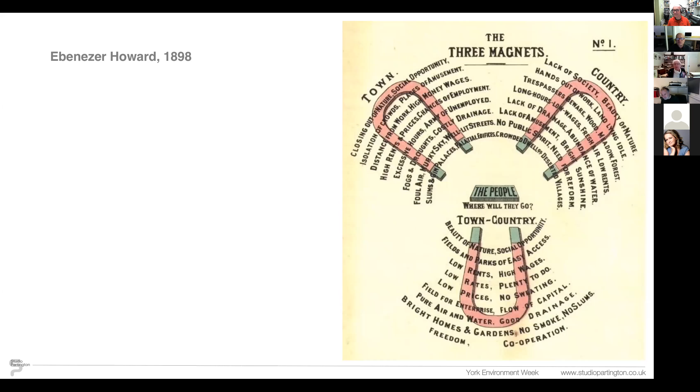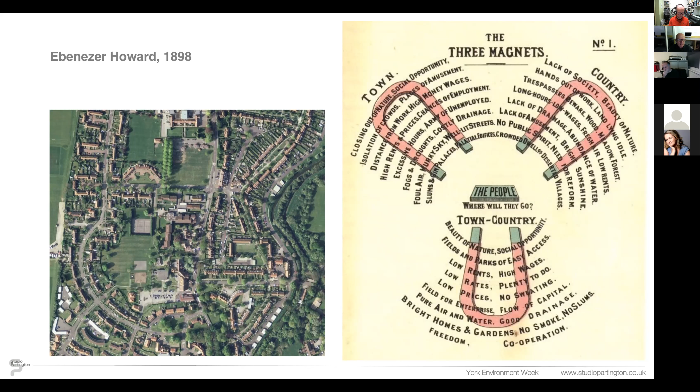And Derwenthorpe, of course, is, because of its position on the edge of the city, in some ways very kind of close to the potential for Garden City thinking. So it's on the edge of the green belt, but it's well enough connected to the city. And with the expansion of the university, it's also really well connected to workplace. So some of the kind of Howardian thinking resonates a little bit in the way that people thought about Derwenthorpe in the early stages. So that's the sort of historical context.

But the contemporary context, so thinking about how to deliver homes in sort of 2005, the beginning of the 21st century, and especially how public housing was funded, is absolutely characterized by standards and design guidance and regulations. And in fact, you couldn't build public housing without adhering to this sort of plethora of standards.

And unfortunately, it got picked up by David Cameron, and it was used by the coalition in 2009 and 2010 as a sort of rallying illustration of why modern society was bogged down with bureaucracy and all of this unnecessary procedural stuff that the Labour government had introduced. My point really, though, is that although all these things are well-meaning and we do need regulations and standards, what tends to happen is everybody designs down to them and they don't really set the context for ambition or creativity or aspiration.

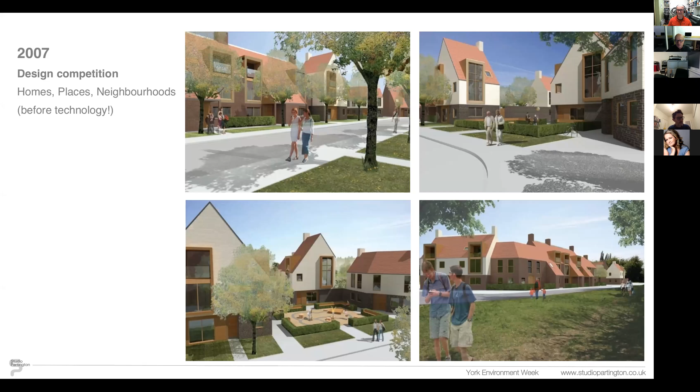And the reason that the project withstood all of that pressure is really because of the strength of personality and conviction of trustees at Joseph Rowntree, key people at York City Council who were the landowner when we first made the first planning applications, and the team that the Rowntree assembled, so people who were advisors, professionals, advocates for good design and for some ambition. And so in this talk, when I say we, I don't mean we as a practice or we as architects, I mean that collective group of people who defended the ambition of the project and saw it through all of the travails of trying to build after a really catastrophic recession.

So there's just one more thing to say really in terms of background and what we were doing, because it's another thing that's really not understood about Derwenthorpe or is slightly overlooked. And it goes back to the purpose and mission of the Rowntree Foundation really, and the Housing Trust, which at the time was encapsulated in the words search, demonstrate and influence. And lots of people felt that Rowntree was very good at doing research, policy research, social research. And they had done one or two very small demonstration projects, but the influence part of their mission, they had been very quiet on and hadn't really made an impact on mainstream thinking.

And so when it came to the time to decide how we would build this scheme, there were some really interesting conversations. And the general feeling was that it would be quite straightforward to go and find a local building contractor, a really competent builder to build these fairly unique houses, all one-off bespoke homes, and to do that well and to have a scheme that was successful in terms of construction quality, and probably environmentally as well. But actually that wasn't going to change the way that homes were built in the UK. And it wasn't going to get the major house builders engaged with things like the Code for Sustainable Homes and the Zero Carbon Homes policy.

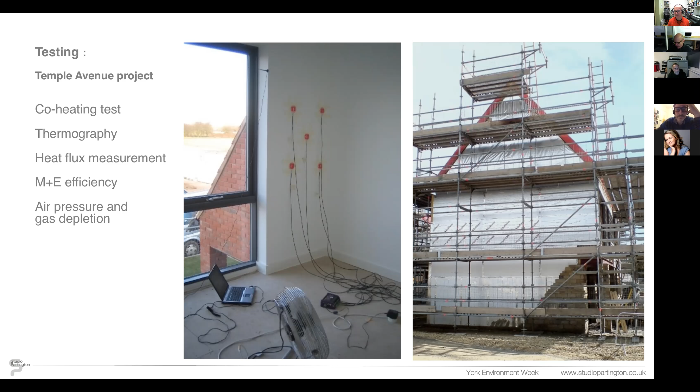And of course, Joseph Rowntree being Joseph Rowntree, they did some of the things that are normally left to the end of a project right at the beginning. So the first thing they built was a park, and they invited all of the local neighborhood to participate in the use of that and the play area. And it was connected by a public thoroughfare, which was the Sustrans route.

And there's been much discussion, if you know about the history of Derwenthorpe, about the validity of the decision to use district heating and its relevance in terms of low carbon and low energy design. But at the time, you know, there were huge incentives, for instance, the renewable heat incentive. And it's an indication really of how much energy policy has changed in such a short period of time that we're now talking about all electric housing schemes and a decarbonised grid.

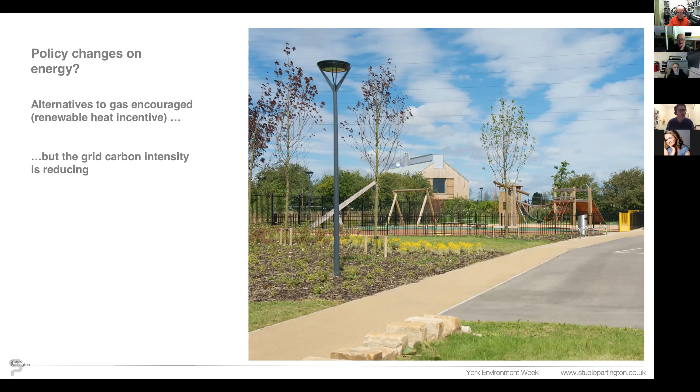Whereas when we started Derwenthorpe, you wouldn't have been able to get an electrically heated house through building regulations because of the carbon intensity in electricity. So things have moved very rapidly, and we've been very fortunate because we've been involved for this 13-year period, that we've been able to adapt the designs and adapt some of the technology as time has evolved.

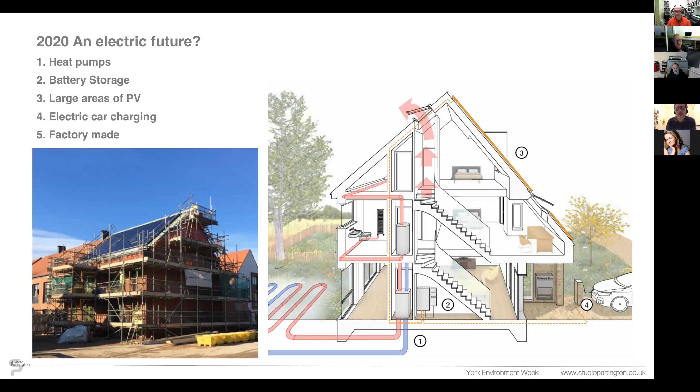And the most recent homes we've built at Derwenthorpe have actually been off the district heating system, and they have been built with a different kind of approach where the solar capacity has been maximized. They're electrically heated through heat pumps, and they're built through a set of conventions that are intended to assure the performance of the homes over the next 30 years. So there's a contract with a separate contractor who's basically underwriting the energy performance.

So I've got a few slides now just on really the things that I think worked very well. And looking at those, they're all actually things that people told us not to do. And when I say people, I kind of mean the bureaucrats and the officials and the council type people who really adhered to all that matrix of standards that I showed you at the beginning of the talk. They're the people who kind of need a design guide as a kind of nursing blanket to give them comfort in discussion with designers.

And lots of the things that we did are actually things that were going contrary to that kind of received wisdom and that practice. So the first one, and this is an initiative that's been pioneered in York actually, and the council must have credit for that, was to entirely integrate the affordable housing. And Derwenthorpe is pretty much unique, I think, in the country in a private-public partnership of having 40% of the homes as affordable homes. And the homes are scattered around the scheme in an entirely random way.

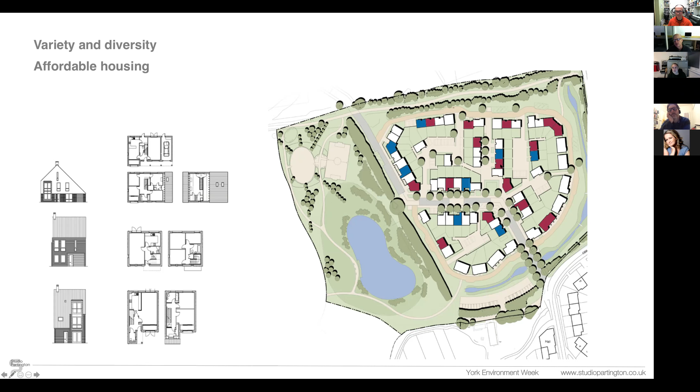It means you have no idea when you're walking around which is a rented home, which is a shared ownership home, and which is a private home. And an example, say here in this little part, white is private, blue is shared ownership, red is a socially rented home. And you see that in practice and with what's built, there's absolutely no differentiation externally.

And we did lots of work on trying to devise a range of different types of house. So starter homes, which were big enough for a family to expand into, so a home that wouldn't evict you at the beginning of life. And then homes that were incredibly flexible in terms of adaptation and changes that you could make as you got to later life or infirmity or disability. So what people now call lifetime homes, which was again pioneered by Joseph Rowntree and trialled very much at Derwenthorpe.

And we created streets that weren't dominated by cars. So this was a kind of European idea of making home zones, but specifically identifying parts of the scheme where a car would only venture into it if you needed to make a delivery or drop somebody off. And all the surfaces where vehicles would normally be driving on tarmac, with local authority curbs and yellow lining and signage, we did away with that entirely.

And we just said, look, everybody should just walk on footpaths, and footpaths should, as you get nearer the home, get progressively more refined and nicer quality. So as you get to the entrance of the door, there's something that celebrates the fact that you've arrived. On the right-hand image, you see at the end there's a little space, a little square at the end of that home zone. And here we put a little park, a little play area.

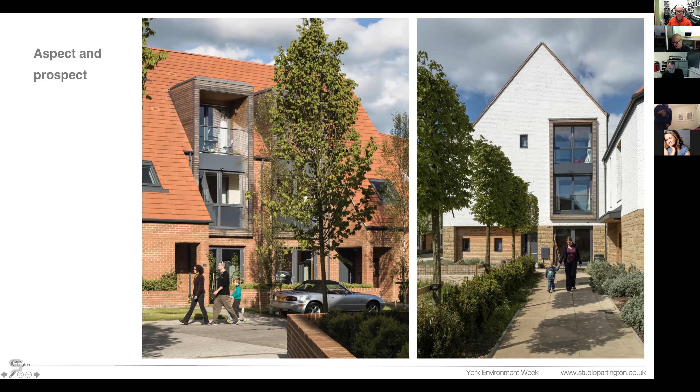And so on the townhouses and these taller houses, what we thought would be nice is we'd create a kind of haven at the top of the house where the master bedroom has a really generous ensuite, it has a dressing room, it has a study, and it has this external balcony at the top of the house. And of course, that's proven to be something of a godsend. Firstly, parents or people doing work at home can be detached from the noise of the shared living space on the ground floor. But it's also proven to be something of a refuge now that we're all living with each other, having homeschool and homework and multi-generational living forced on us by some of the circumstances this year.

So this is a great one. This is a house that I designed, and basically, I just sat down and designed a house that I'd love to have. And it became one of the house types at Derwenthorpe. And we were told by this character called the Secure by Design Officer, again, very well-meaning, wants to reduce crime by designing out the potential for antisocial behavior or threatening behavior. So you don't want to have these setbacks by the entrance. You don't want to have these columns. Somebody mischievous could hide behind them. It's a completely reductive view of the world.

I think every house needs to have a generous area where, if it's south-facing, you can sit out the front and say hello to your neighbours, where you can tend your front garden, where if you're arriving with all the shopping, you can put your bags down on a chair and you can find your keys without getting soaking wet. So, some of the things that we know instinctively characterize a really great home are beginning to be filtered out by some of this well-meaning design by code and design by standard.

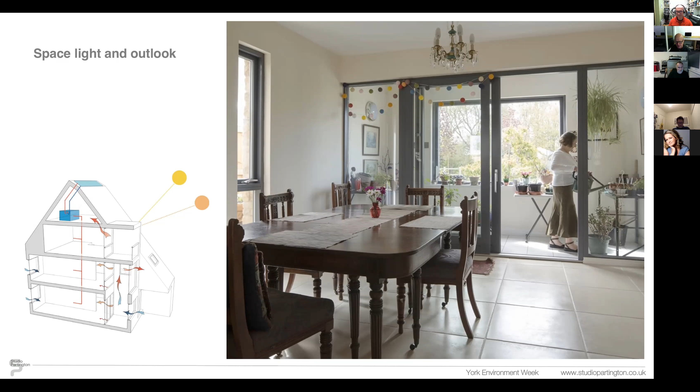And of course, I was laughed out of York when, 5 years ago, I was talking about homes overheating. What I should have done, I guess, is just say, actually, these homes have no purpose whatsoever, but people are going to love them. And that's the best reason for keeping them. So they were a bit of a casualty of value engineering.

The things that were retained all the way through the scheme were the quality of the landscape and the external environment. And we just took the view that the landscape was a gift. Why wouldn't you do your level best to make best use of it and design around it? So instead of seeing trees as awkward things that get in the way of your road layout or reduce the density, you make the tree the focus wherever you can of one of these meeting and resting places.

And we also inherited, as part of the original outline plan, some protected landscapes. So what you see here is actually the remnants of a ridge and furrow field. And so that's been incorporated with the Sustrans route, within one of the landscape spaces that the houses overlook.

And it's been really extraordinary, right from the beginning of lockdown, the number of people who've emailed me or contacted me to say, we feel so lucky, we're so fortunate that we have a home that we really enjoy, but it's also a home that's in this extraordinary landscape, this kind of relief from the pressure of lockdown and being inside.

One of the things that's not been so successful, and I think this is an issue in the whole of York really, and David McHale is going to really come up against it in his projects around Bishopsthorpe, is that York still doesn't have the quality of public transport that means that most journeys are automatically more convenient by cycle or by walking or by taking the bus.

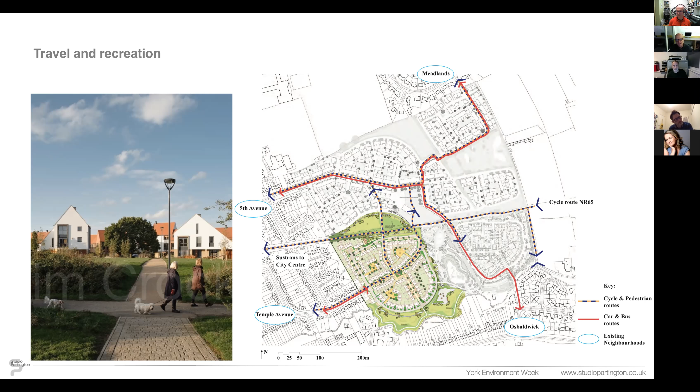And we use the car club car for going to the dump, great idea, picking up the bricks from the builder's merchant, hauling the charcoal for the barbecue and things. So beginning to be, I think, a change a little bit in people's expectation that they'd have space for 2 or 3 cars with their home.

But other things to do with public realm and parking went incredibly well. And one of the things that we really benefited from was a really progressive attitude from the highways department in York. And people in design and built environment are always kind of frustrated by highways rules and highways regulations, turning circles for bin lorries and set off distances and verges for services and things.

And York, to their credit, and if you've ever worked outside the city, you'll know how difficult it is, York were absolutely pioneering in buying into this idea that the streets could be shared spaces where basically you walk down the middle of the street, you don't need a designated footpath. And motorists get used to the idea that you're driving through a pedestrian domain.

So you drive as if you're driving on a campsite, you know, just expecting kids to be on their bikes, a ball to kind of appear out of nowhere, somebody to be, you know, not expecting a car. So the cars drive very slowly. And one of the reasons why the highways people said, well, we can really understand what you have in mind.

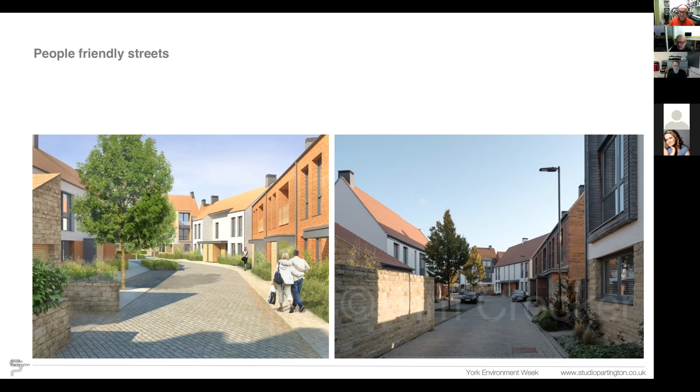And you can see there's a really strong correspondence between what we imagined and what we tried to describe to other people and what was actually built. And again, that's down to this kind of perseverance really of trustees and the people who were the guardians of the project. A fantastically supportive environment for us to work in.

So Richard, are you kind of close to the end of yours?

Very, very close, yeah. So you can imagine the conversations we had about guardrails and water and the health and safety obsessives saying, oh, you know, you can't put a lake in the middle of the scheme. It's sort of a dangerous thing to do and all that kind of stuff. But of course, the lake didn't start life as a lake.

It was a SUDS scheme, you know, to balance the surface water runoff and not discharge too much water into Osbaldwick Beck. And it was kind of one of our main contributions, that is us as Studio Partington, to say, well, no, this needs to be a central feature of the scheme. It needs to be kind of the defining external landscape feature.

And so we made it much shallower and we made the edges very, very gentle. So you can walk quite a long way into it before you're out of your depth. So it's relatively safe for kids. And it became the focus and the kind of center point of both the ecology and all the landscape and public places.

So just a few slides to finish off really, to go back to this question of whether we actually influence mainstream practice. And there was a kind of purple period while we were coming to the end on Derwenthorpe, where we were also asked to work for Barratt on several schemes. And this one at Terry's Chocolate Works got built.

And it was while there were still some very pioneering and ambitious people in the Barratt organization, all of whom have now moved on. And it was also before the government gave up on any kind of standards for housing and any kind of emphasis on design quality. So by the time the Tories had got re-elected and abandoned their coalition partners, they had really been mugged by the house building industry, who said, we just can't deliver the number of homes we need if we're bogged down with all these environmental standards.

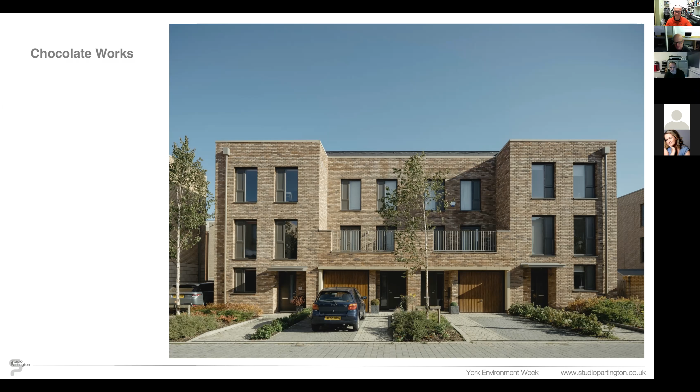And we introduced this first floor balcony, and we insisted on doing, actually, and York backed us up on this, all the working drawings for the scheme and supervising all of the construction all the way through. And Barratt probably built every house twice to get it right. So it was a painful process for them and painful for us. But this kind of architecture really relies on the quality of the detailing, and the quality of the execution is actually of a very high standard.

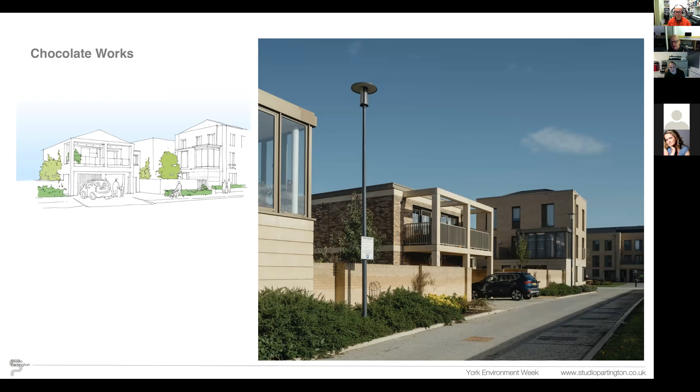We persuaded them to do all kinds of interesting things. So like this conservatory at the first floor is an extension of a first floor living room. And this house on a corner has one of the larger gardens, but its garage at the end of the garden then has an apartment above it. So we were trying to make a streetscape with pavilions and coach houses rather than just large houses with garages at the end of them on a side street. And you can see the little thumbnail sketch on the left is our conceptual drawing, drawn 4 or 5 years before this was actually executed and delivered on site.

Getting them to engage with building in stone, building this fantastic south-facing colonnade was very difficult. And we had to use all our guile and persuasive ability really to suggest things like, well, on this building, don't build one of your expensive marketing suites. Don't throw all that money at a new building that's only temporary. Why don't we do a building that's a mixed-use building? Put the marketing suite in it on the ground floor, and then in 5 years' time when the scheme's built, that will just change use to become the supermarket or the convenience store. So they went along with all of these suggestions, which for them were right outside their comfort zone.

So to come back to things that I value, and these are the kind of things I do when I'm bored in site meetings. I go around and I take photographs of people's front doors. And I think these are the strongest indicators of whether we are creating a neighborhood, whether people feel comfortable and feel that their home is something of a haven and a refuge, but also something that's liberating and empowering. The fact that people leave Wellington boots out and benches, they leave their pots outside the front doors. They've customized all of their door numbers.

This little lad at the bottom, I met him down at the Osbaldwick village end of the scheme with my camera taking photographs. He goes, "Oh, mister, can I be in your photographs?" I said, "Well, I'm not sure about that. That's not really what I should be doing, photographing you, but let's go and talk to your mum. And if she says it's okay to be in a photograph, then that's fine." And this guy raced off on his bike and I followed him on my bike. And it took me about 15 minutes to catch up with him and get to his house. So his family were obviously really confident that he was playing on his bike, such a long way away from his house, perfectly safely. And of course, very pleased to then be in the photograph on our website.

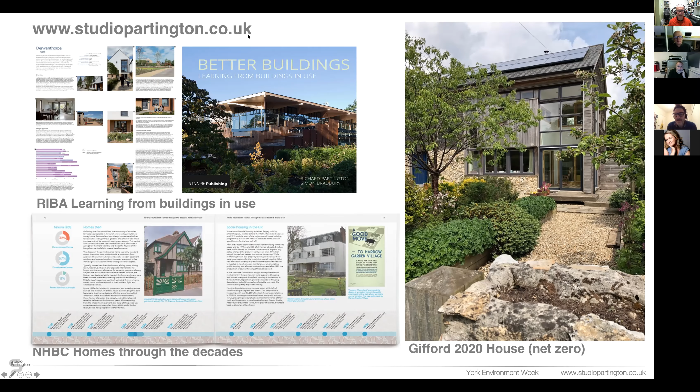He's now turned his camera off. And I need to work out how to stop screen sharing, Phil. Yes, that's it. Hi, everyone. Hi, Phil. Hi, David. Thanks for inviting me tonight. I'm sorry to give you a heart attack earlier.

Excellent. Right, you should be able to screen share now and put your presentation on. And do feel free, please, just to give a brief introduction of yourself, because I've left it to the two of you to say who you are and to tell people what you want them to know. Yeah. Share a screen. Let's have a look. Desktop. Share desktop. Brilliant. Can you see that? If I go full screen. There we are. So Phil, yeah, thanks.

I'm David Mikhail, founding director of Mikhail Riches. We're architects with a focus on housing, both local authority and private. I'm just conscious of time. I've been told I've got 20 minutes. I've got 60 slides, so I better rattle on.

I just wanted to pay homage, first of all, to Phil, and I know that he introduced us to York via the Housing Design Awards and with a focus on our scheme for Church Walk. So I'm going to talk about that before moving on to Goldsmith Street, some of the learning that went into Goldsmith Street from previous projects, and then finally a lens on the work we're doing with York City Council, if that sounds okay.

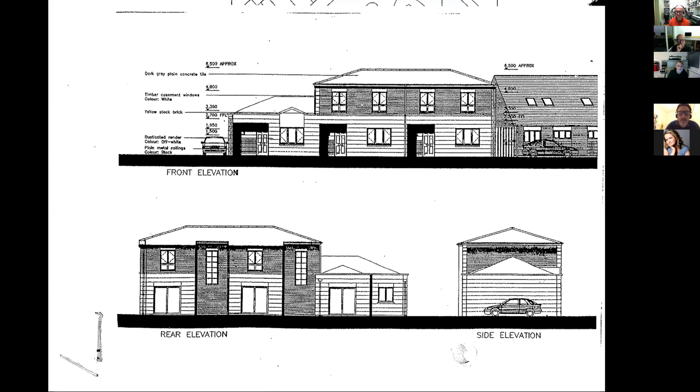Right, so back in 2004, I think, I got an email saying there was this site down the road and it was up for auction, and good news, because I've been looking for a site for a long time, and the bad news was I had 3 days to go before the auction. It came with a planning permission for 2 houses and a bungalow. It was also massively overlooked from a building at the back. As you can see, living rooms looking over the site.

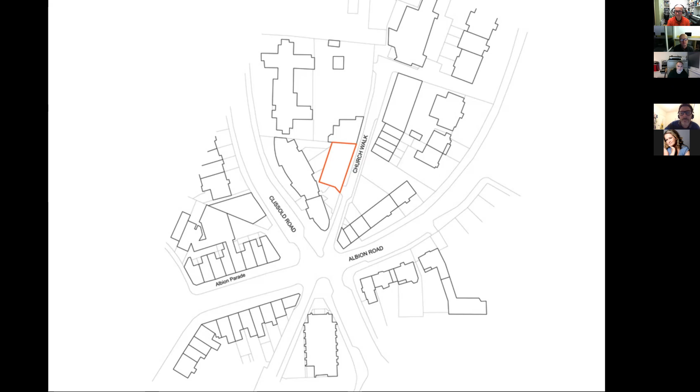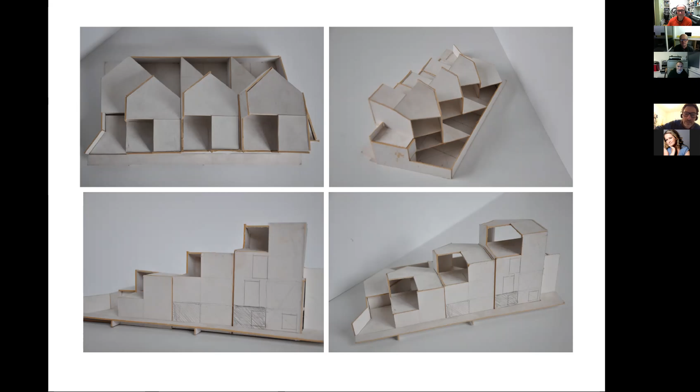And the scheme we did for it on our kitchen table, Annalie and I, and made of cardboard, was all about trying to optimize a very tight 22 meter by 11 meter site in such a way that we avoided those windows overlooking at the rear. And the strategy for that in plan was this. So the street is to the bottom of the page, and to the top is our neighbor, which was at a kind of 45-degree angle to what is predominantly a rectangular site.

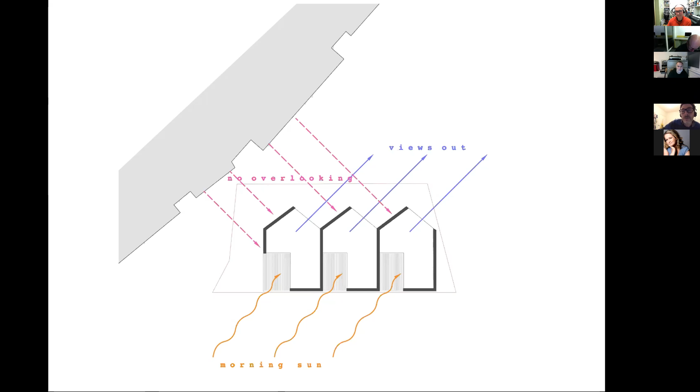And so we evolved this kind of geometric technique for a tessellated plan with solid walls presented to the neighbors, allowing perpendicular windows which avoided overlooking and being overlooked, and also enjoyed long views out. And as built, that's pretty much what we've done. And that tessellation appears in the building in various ways, with little triangular roof lights on the ground floor at the back.

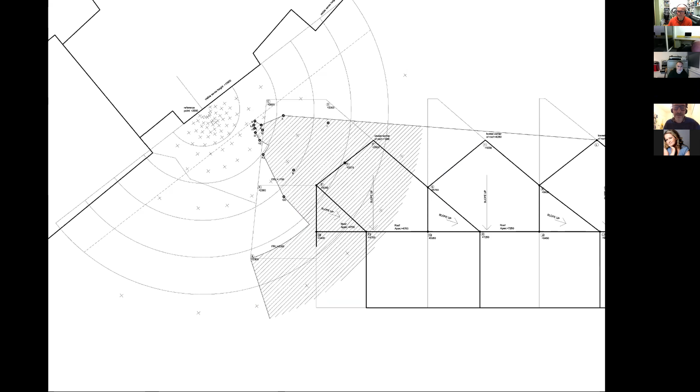Everything was very, very heavily scrutinized by the planners because there was a lot of objections from neighbors. This was our pre-computer decade rights of light and BRE daylighting guide, which was all done with a bit of cellophane and some pens. And what it really told us was that there were a number of vertices in space that we had to stay within to avoid injuring our neighbor and his or her light level. So actually a very strong response to neighborliness is, I think, what characterizes this building.

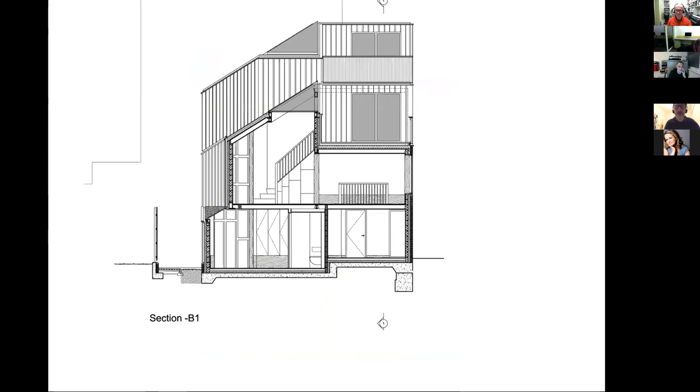So optimizing a difficult site. The building goes all the way down to 2 meters above ground floor level in that very difficult corner, all the way up to 4 stories at the other corner. And internally, I don't have time to dwell on the plans and the sections, but all the living spaces and dining areas have double height spaces with triangular roof lights. Bedrooms tend to be on the ground floor, so they're upside down houses and flats.

And that last one, which you see Annalie pushing Ridley into, is a kind of 4-story flat with its own front door. But what this project had was a series of front doors onto the street and some very difficult relationships which we wouldn't usually dream of, but which the site itself kind of enforced on us, such as bedrooms on the ground floor, onto the street. And so

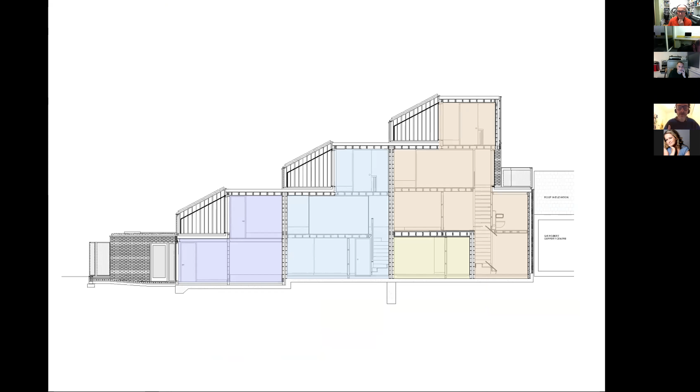how we dealt with that was some very unusual sliding security screens which allow light and views in and out, but in a very controlled way. So there's a sliding security gate which gives you a view right through to the back garden, and from the inside this 3mm aluminium mesh allows views out and light in such a way that you can manage privacy because of the strand orientation of it.

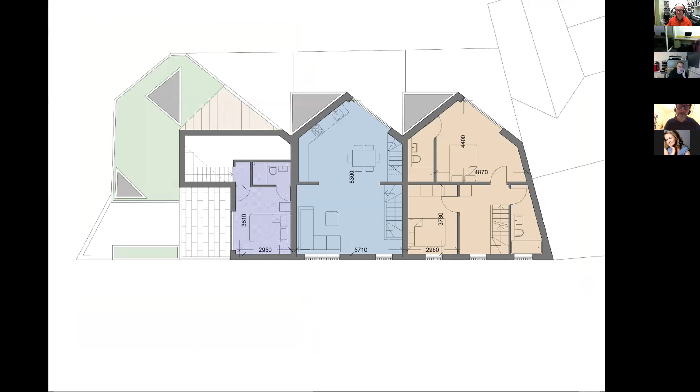So I'd say this project was incredibly bespoke, and we were thrilled that it picked up the Housing Design Award, the Mayor's Award, in fact, for that year. And I think Philip would have drawn your attention to it when you talked about the Housing Design Awards that year. And I think it's part of the work that the practice has done, which has been about domestic space, one-off houses, extensions to people's houses, thinking about what makes a great home.

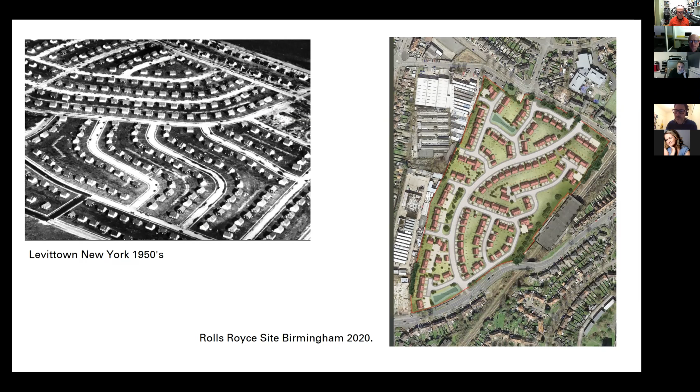And this is the enemy as far as we're concerned. This is the edges of most towns and cities in the country at the moment. There's a whole analysis that goes with the slide. I don't have time to show you, but essentially there is no communal green space. There are probably 1 or 2 trees. Everything is dominated by tarmac and parking courts. So with that in mind, I want to talk a bit about Goldsmith Street and how we got there.

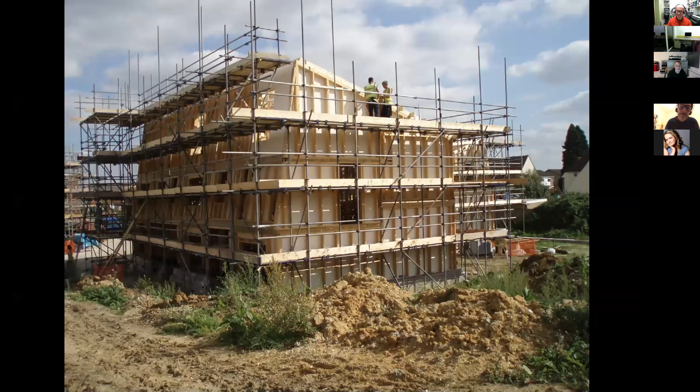In 2005, again, we were very thrilled to win our competition for housing in a village called Elmswell in Suffolk. This is it, 28 homes for a local housing association. Very deep green in its construction, so very low embodied carbon, using sprayed hempcrete into a prefabricated timber frame. There they are, gunning it in. There were some teething problems on site, as with all innovations. We had to swallow our pride and get the specialist over from France to help us, but it all came good in the end.

Some of the things we embedded in the scheme worked well, and some things didn't work so well. The district heating system, which was biomass, as Richard has said, enjoyed quite a lot of encouragement at the time, for lots of good reasons. Very low carbon, local fuel. Thetford Forest was supplying it. Didn't work very well. But what was really great was Buro Happold, who were the sustainability engineers for this project, employed one of their team at PhD level to do a 2-year post-occupancy analysis. And it's a fascinating read.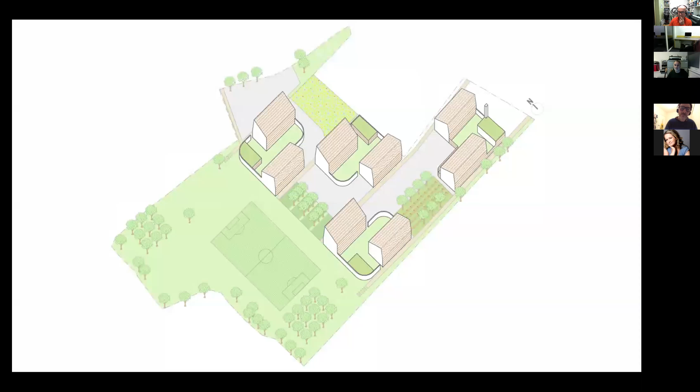I can't really talk about that tonight, but one thing we came away thinking was that if there's one thing we can do which really does bring benefits to residents, it's to face as many of the properties south as we possibly can and to harness the winter sun. Because whilst a lot of the sustainability benefits, when measured, were quite questionable, the one thing that did work really well with this scheme was the fact that we'd orientated every house to face south, and the section through the properties was all about managing that low winter sun so it penetrated into south-facing rooms.

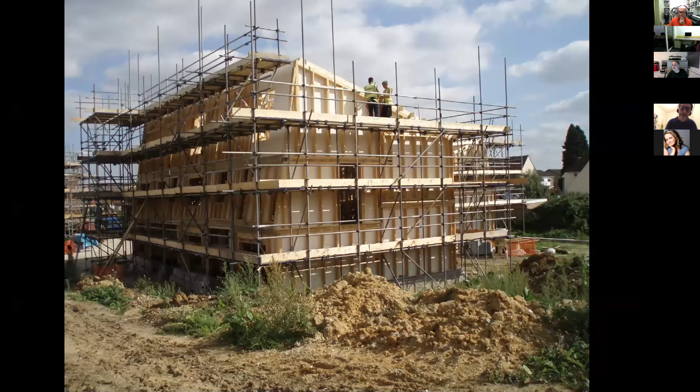And it was an aspirational brief by Norwich City Council for a very important site as far as they were concerned. It had history. They really wanted to make this an exemplar project. And the brief was inspiring enough, but actually one of the challenges of the brief was a density of about 100 homes per hectare. That was, we believe, sustainable because it's a 10-minute walk away from the centre.

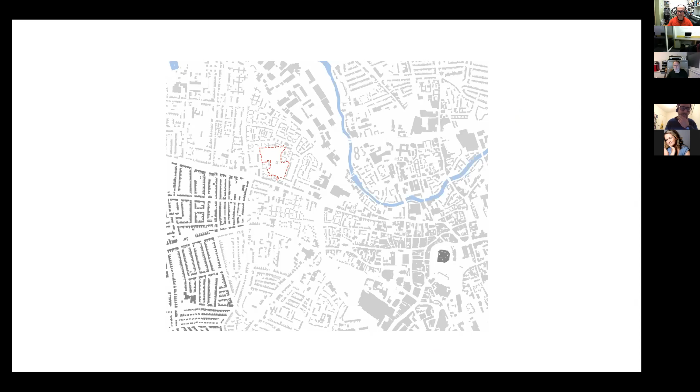However, when we looked at trying to marry both providing that level of density with family homes and houses, we couldn't really see a way to do it initially. And a lot of tracing paper was used up. In fact, I can remember we had 2 or 3 schemes and a couple of crits with friends of ours, and we had to bin a number of schemes before we alighted on the understanding really that perhaps the best model was local, that about 5 minutes walk away from the site is an area known locally and very affectionately as the Golden and Silver Triangles.

And these are the kind of houses that we find there. It's terraced housing. You find it up and down the country, really. It's not particularly remarkable or particular to Norwich, but it's Victorian, Edwardian terraced housing, front gardens, back gardens, on-street parking. And when we looked a bit more closely, we discovered that both the backs and the fronts were separated by 14 meters, which of course, as I'm sure most of you know, flies in the face of most planning guidance, which generally talks about the magical 21-meter overlooking distance. So this is Portland Street and Dover Street in Norwich.

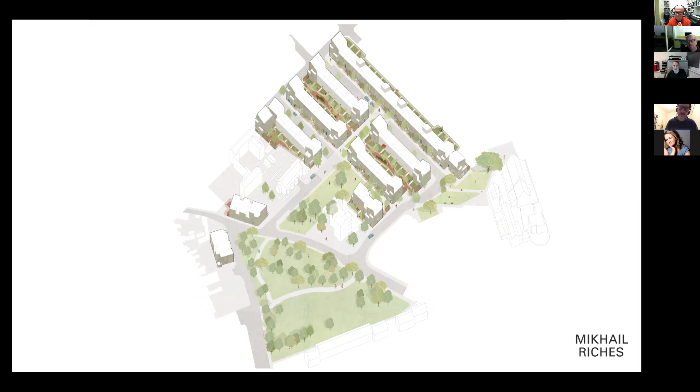So we applied 2 things to the site at Goldsmith Street. We applied the learning from Clayfield, which was to try as hard as possible to deliver a solar scheme facing south, harnessing low winter sun, but also to look at 14-meter wide separations between properties. And this is an axonometric which shows the kind of layout of the master plan, which respects a series of terraces which face south, streets separated by a 14-meter separation, and back elevations as well.

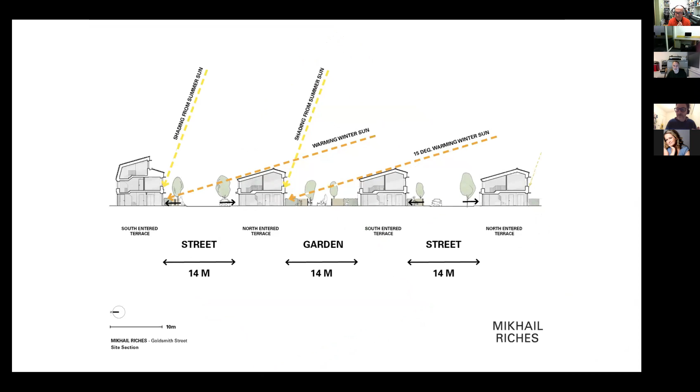In section, you can see there very clearly that the separation between terraces is 14 meters, garden and street. The roofs, like Clayfield, a different typology, but the roofs here again are modeled very carefully with very low eaves levels on the north side to ensure that the low winter sun is harnessed. When it comes to the site arrangement, the terraces have been arranged in such a way as to make sure that back gardens face existing back gardens, that wherever possible, streets and front doors are onto and connected to existing streets. So to achieve this site layout, we had to drill right down and invent new housing types, which would lend themselves to exactly this 14-meter separation.

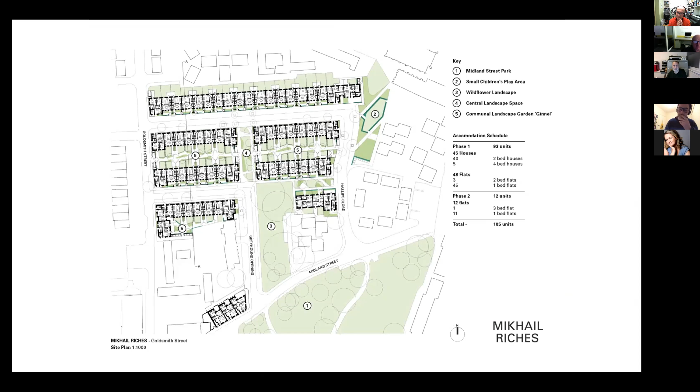A bit more detail here, you see a number of external spaces which are very important to the success of the scheme as well. So I'd like to stress that I think the success of Goldsmith Street is partially about its environmental response, its low carbon agenda through Passive House, and to an extent through low carbon materials. But I think for us as a practice, one of the most important aspects of it is the social ideas behind public space.

I don't know if you can see my cursor, Phil.

Yeah. To the right is a small children's play area, which connects to an existing church and a footpath through to the wider area. This here is a pair of existing and lovely catalpa trees, which forms the kind of focus of the whole scheme. The streets themselves are seen very much as public space with on-street car parking, street trees, etc. There's also a series of connecting alleys or ginnels between back gardens, which allow for access for bin stores and bike stores. So your bins are held at the end communally here.

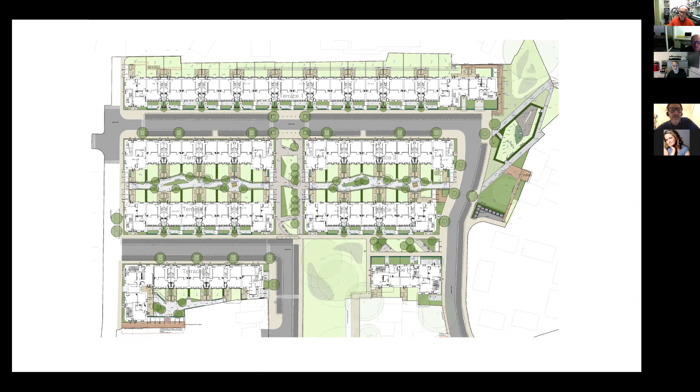And what we've done is we've slightly exaggerated the alleyway or the ginnel to make it more of a place. So it's meant to be, and I think it is, a place for children to play, but also for adults to meet.

That's a typical street, and in it you're looking at, on the left, the south-entered, south-facing front gardens and front doors of one of the terraces. To the right-hand side, you're looking at the north-entered houses. And so to the left, the houses have front gardens. To the right, on the north side, they have that situation you find in many streets up and down the UK with living room windows directly onto the street. In this case, separated by a 300mm planting zone.

That's more of the south-facing gardens, bin stores, and meter cupboards very carefully designed out so you don't really see them. And that's a view right down the center of the scheme with your back to the south. So you're looking north. And what you're seeing on the right-hand side is the catalpa that I mentioned earlier. And the bigger 3-story buildings which face onto this kind of square are the flatted end blocks. And there they are again at the other end of the terraces, this time looking down Goldsmith Street itself.

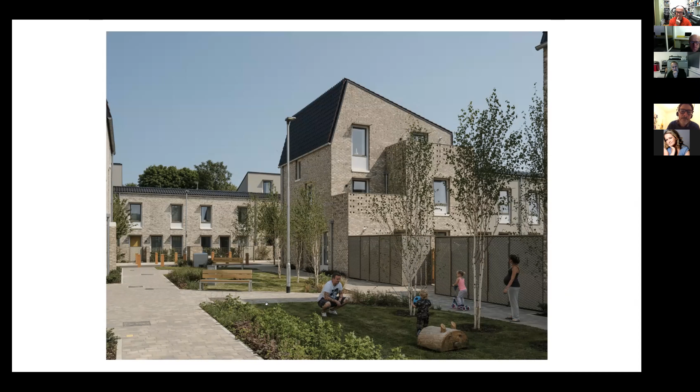And this is that central shared space, where the expanded aluminium doors of bin stores and meter cupboards kind of hide the back gardens, and you can just glimpse through here the secure gate to the ginnels. And children tend to just kind of roam through these ginnel spaces out into the public space on their scooters. That's one of the ginnels. So, it's not enormous, but it has a huge impact, I think, on the lives of residents.

One of the residents who's not got children did call it Kidmageddon, which I quite liked. She had a wry smile on her face when she said it.

And the facades of the street, the front doors, each front door is a different color. Boring, isn't it? You know, it's rectangular windows and a roof and a brick wall and front gardens. Really simple stuff in a way. There's no architectural gymnastics, but what there is is a very careful, and I'm sure any of you that have dealt with passive house principles know, a very careful iterative process of testing and retesting the exact size of the windows, the exact amount of cold bridging allowed, therefore the number of doors allowed in the scheme. So even so, we spent a lot of time trying to make sure that the architecture was as much in the process as the passive house principles, which we were signed up to achieve. So I should say everything is 100% certified passive house here.

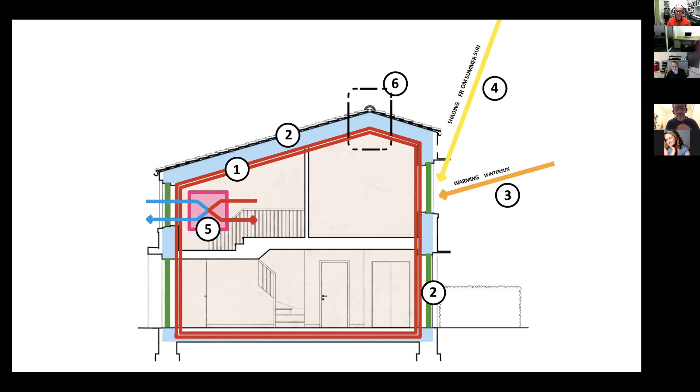We were absolutely desperate to make these houses work for people inside as well as out. So the quality of the kit in here is first rate. And we got advice from the Green Building Store, who had a lot of experience putting right whole house ventilation systems around the country that had gone wrong. So we benefited from their learning, both in terms of spec and installation. What does passive house mean for the fabric? Well, the air tightness has to be very carefully controlled.

But architecturally, you're dealing with very thick walls, as we were, because we wanted, and the client wanted, a very low carbon, non-petroleum based insulation. We used recycled newspaper blown into a timber frame with a brick cladding, which was all about the robustness at street level. We ended up with 600 mil, 2 foot thick walls.

So what you're looking at on the right is the windows, and the kind of coffered, profiled modeling of the windows is partially about making the windows look larger from the outside than they really are, because passive house wouldn't let us have them any larger. Too much heat gain in the summer and too much heat loss in the winter. So it's a kind of trick, if you like, to make the facades look a bit more generous. So the eyes on the face are larger.

But that coffering is also inside out, not making the windows look too much like a kind of castle wall and too depressing, if you like, from the inside.

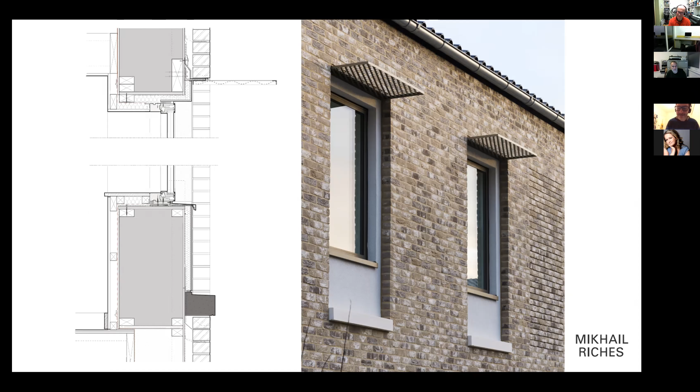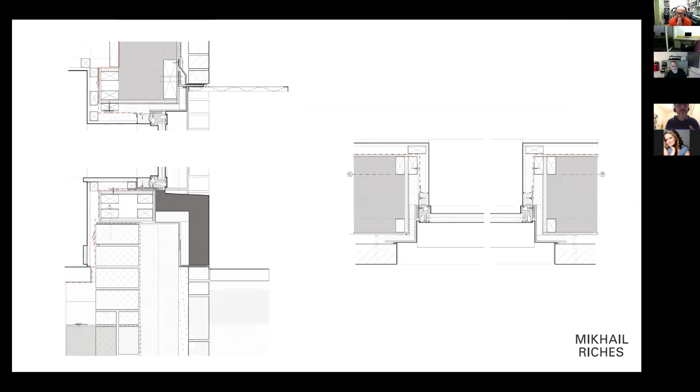My project architect, James, wasn't thrilled. He'd done all the details in zinc, but that's another story.

These are houses where you walk directly into the kitchen dining room off the street, off your front garden, or in this case, this is a south-entered house. Again, a typology we've known and loved and lived in ourselves up and down the country. You know, it took some courage from our client, but they went for it. And I think the benefit is a super wide house, 6 meters, not very deep, I think 8 meters depth. So 6 meters by 8 makes for a very light, bright home. And it had to be that dimension to get the 14-meter distance overlooking streets, etc.

So the house type is a function of the master plan rather than the kind of house builder model where you've got your house types and you just chuck them like plastic Monopoly houses on the site. This is a very different approach.

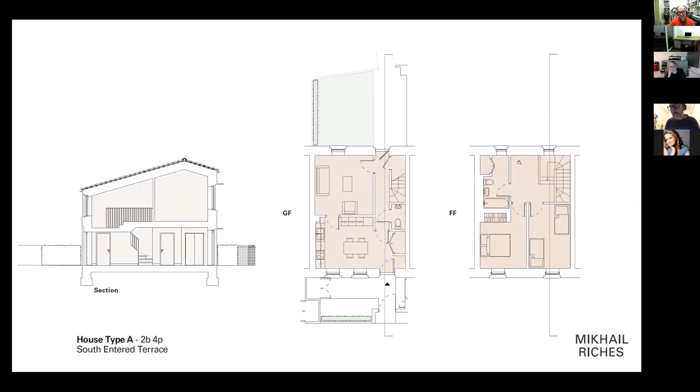2 bedrooms on the top floor, again looking south, and you can see for the eagle-eyed amongst you that the very low eaves on the north side mean a very low ceiling height over that bathroom at the back. And also it's actually 1.7, so you can still stand up. Most people can stand up here for a home working space at the back of that landing, which is very much used, I should say.

The north-entered houses, slightly different. You walk straight off the street into a hallway. But then your kitchen dining room is again facing south over your private garden. These are the north-entered houses. And you know, that slightly uncomfortable situation of a living room or a kitchen window at street level with no defensible space other than a 300 planting strip felt like a bit of a risk.

But actually, in reality, with some plantation shutters as part of the architectural spec on the inside and a bit of planting, actually, it feels great. It feels like a Victorian street does.

The flats I'm really proud of. They're the conundrum of how do you make a flat feel like a house? And I'd had experience in living in a flat where I'd walk straight up to a first floor from the front door. And we wanted to bring that to both the first floor and the second floor flats. And I think it was Annalie that came up with this idea of the scissor stair.

So the flats each enjoy their own front door on the pavement. So once you put your key in that lock, that's yours. You know, that pram space by the stair or that space for loads of shoes or a bike, that's as true to you on the top floor as it is on the ground floor. So the color coding is yellow top floor, blue middle floor, brown ground floor. The ground floor flat is M4(3).

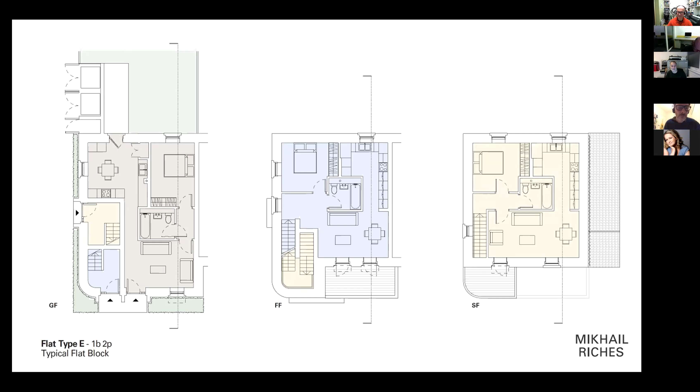So what's happened after Goldsmith Street? Well, we are beside ourselves to be working in York. It's, I think, the most exciting set of schemes we have on our books. Not only do the City of York want to emulate Goldsmith Street, but they want to do better. They want zero carbon where possible. And they want us to also target or at least report on the embodied carbon in construction.

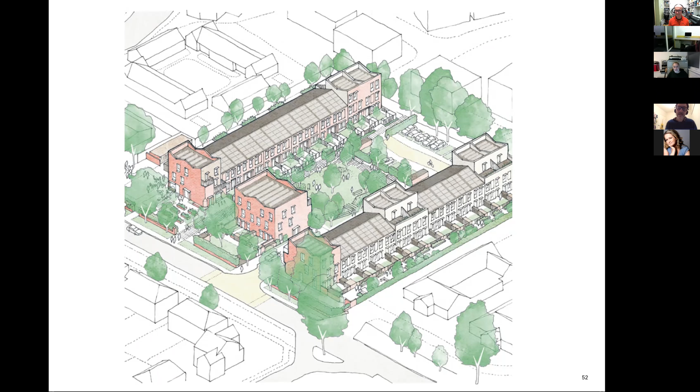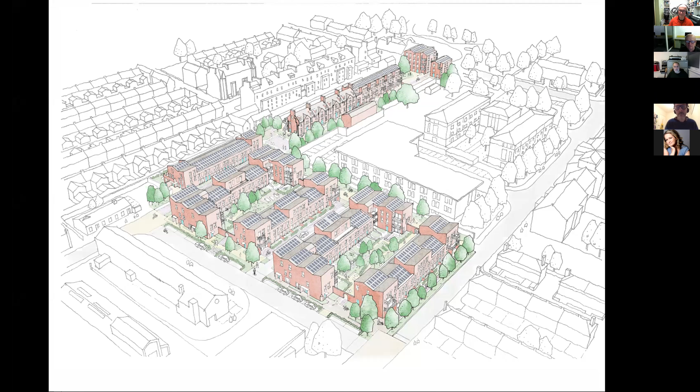There's a great, very joined up housing design program manifesto, if you like, which sets out the aspirations of the team and the city. I'm going to run out of time to talk about it in any detail, but here are a few examples. This is Duncombe Barracks. This is Burnholme near Richard's scheme. And this is an early sketch of the Ordnance Lane site. So we're looking at 3 sites at the moment, all with very similar DNA, but each one different depending on its locality and what opportunities each site offers.

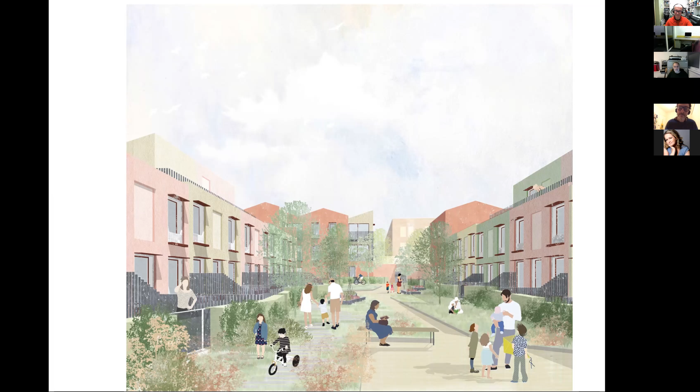So for example, at Ordnance Lane, this is a view of terraced houses, back gardens onto a shared, I wouldn't call it a ginnel, I'd say it's much more of a communal garden, because the site lends itself to, in this case, much wider separation between the terraces. But many of the same ideas like communal growing and an emphasis on easy children's play, which is well overlooked and secure, as the catalyst for growing communities. And that's me done. Thank you.

Thank you, David. That was wonderful. If you're happy to turn your screen sharing off, we'll bring people back into the space. Sure. I can find out, work out how to do it. Stop share. Yes, we're there. Nicely done. Right. Thank you both. That was really interesting. I've certainly got questions, but I'd like to open it up to everybody else first. So do we have questions? Anybody like to stick their hand up and start things moving? Jeff? I see Peggy's raising her hand. All right. Okay. Yes, thanks.

Beautiful architecture, lovely defensible space. I once had a chat with Oscar Newman. And it's good to see you're trying to address the embodied carbon, which I don't think Passive House does. But having cars on your client schemes means the residents have got high carbon footprints. The Derwenthorpe residents were measured by the University of York as over 14 tonnes a year of carbon dioxide per resident on average. The only ones significantly lower than that were the ones that didn't live in motorist households. And that sort of emission trashes any carbon footprint.